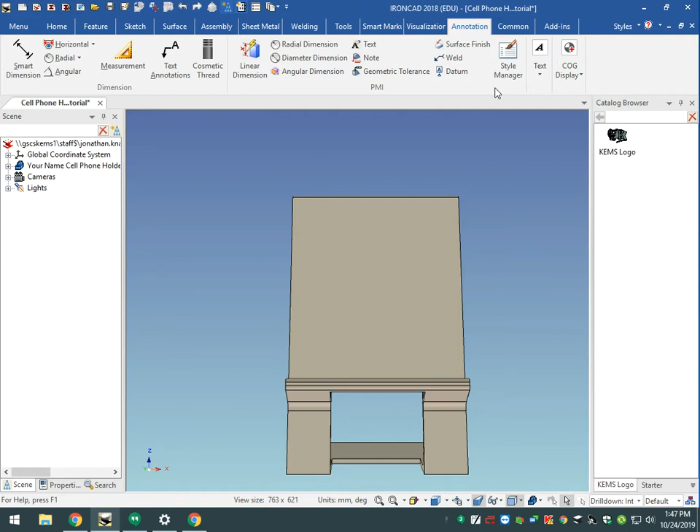To begin with, we're going to add some text. We click on the annotation tab, then click on text. I'm going to left click on text here, then left click on the surface I want the text to appear on. I want it to be 10 millimeters high, and 1 millimeter thick. So I enter 10 and 1, and then next.

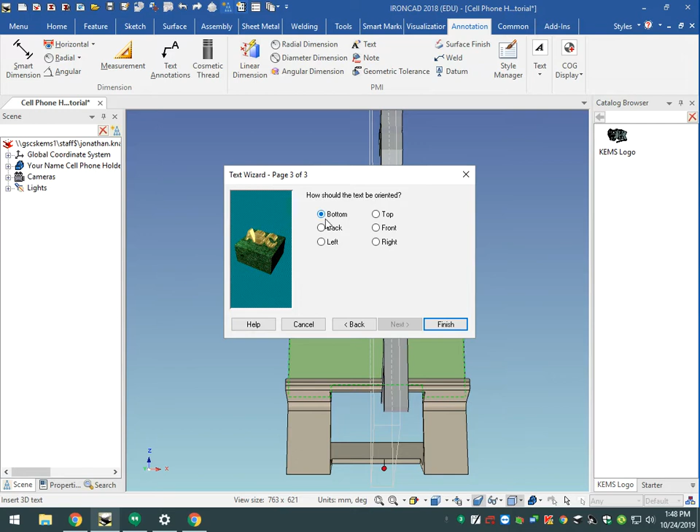We're going to leave this the same, then click next, and change this option to back, and click on finish. Now we're going to enter some text here.

I'm going to left click here twice, just in the blue area anywhere. You can see my text appears now on the surface of my cell phone holder.

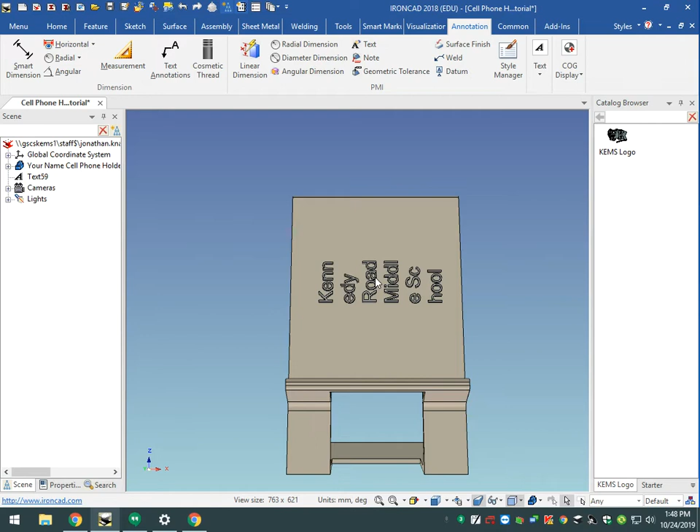I do need to arrange it a little bit, so I'm going to pull these handles, and I also want to maximize its width on the front, so I want to rotate my text.

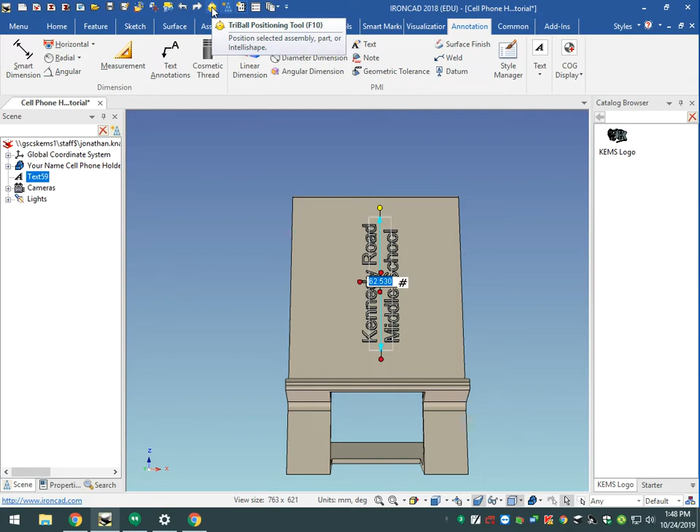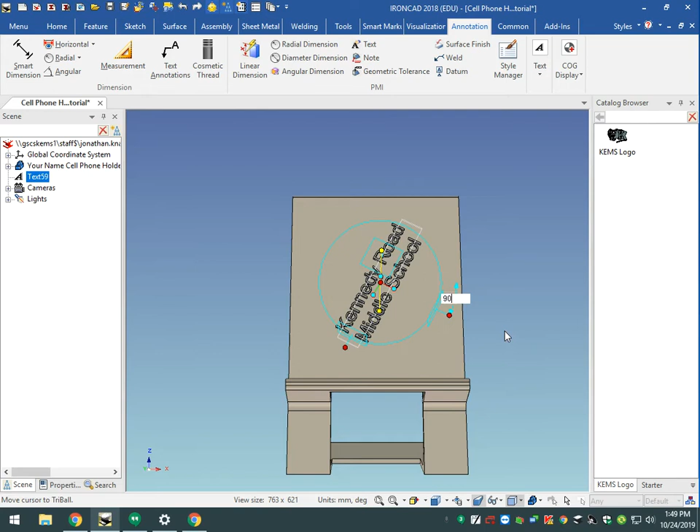So in order to rotate my text, I'm going to come up to the triball positioning tool. I'm going to left click here and select this push pin. Now I can left click inside of the circle right here, and simply drag down and let go. When I let go, this box will pop up, and I can type in 90 and press enter. That rotates it 90 degrees.

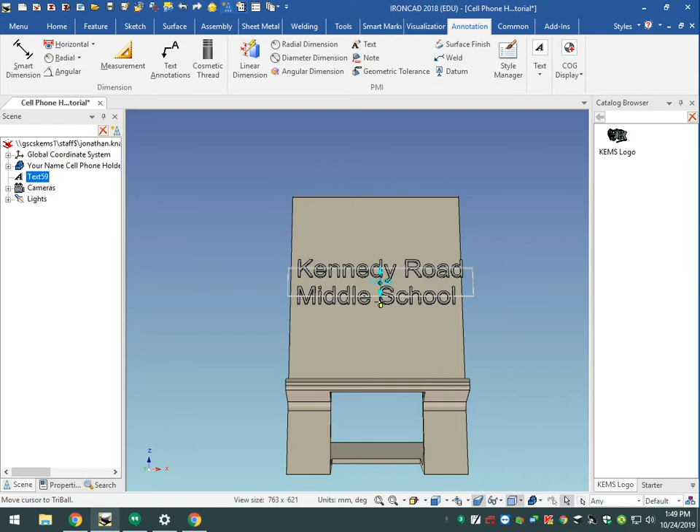I'm going to turn my triball tool off now, and maximize my text size on the front here. If I want it to be as large as it can be, that's probably just a little bit too large, so we just kind of play around with it a little bit.

That looks pretty good. The next thing I want to do is move it up a little bit. So with my text selected here, it's blue, I can turn on the triball positioning tool, and then use this push pin to position the text up higher.

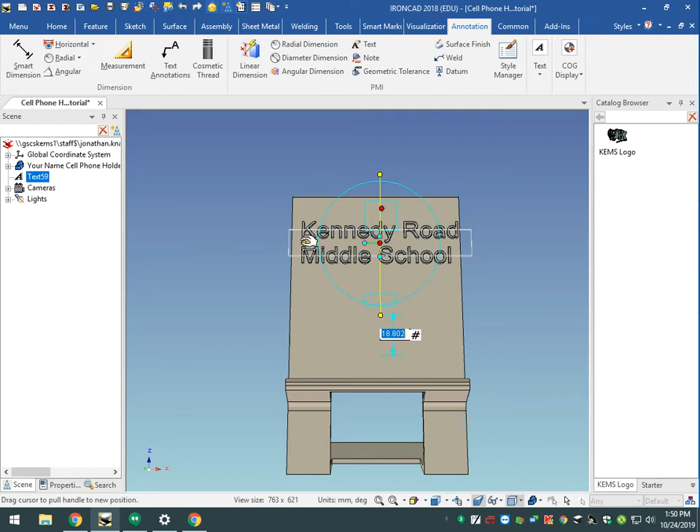I can also use it to center the text on the front of my cell phone holder, and probably put it up here towards the top. Then lastly, I do want to have it be center justified. So I'm going to center justify it and turn the triball positioning tool off.

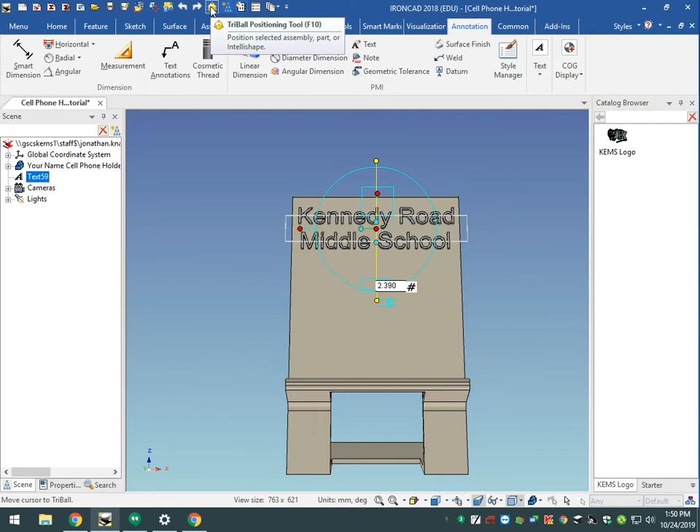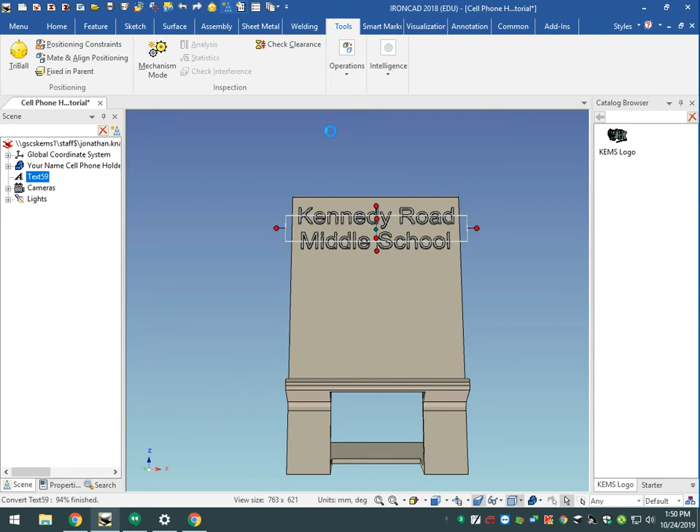Now, in order for me to actually engrave this text, I need this to become a solid part. So with my text selected in the scene browser here, I'm going to go to Tools, then Operations, then Convert to Solid, and I'll just click OK and OK.

Now you can see if I orbit by pressing down the scroll button and rotating, the text has lost its position now that it is no longer text. It's a solid part. I cannot edit the text anymore.

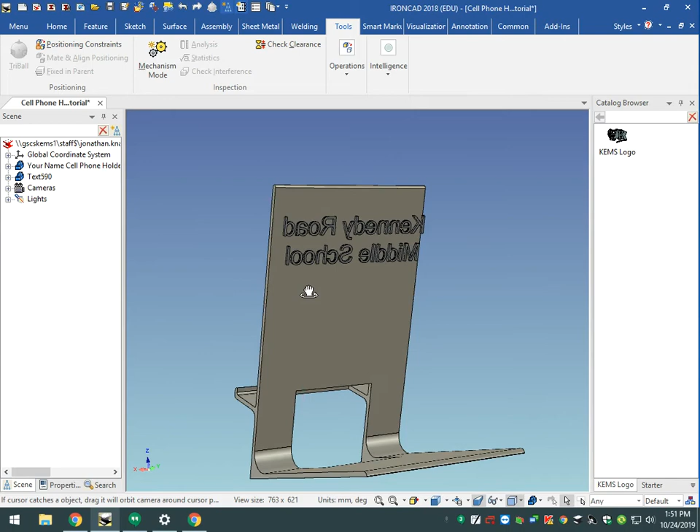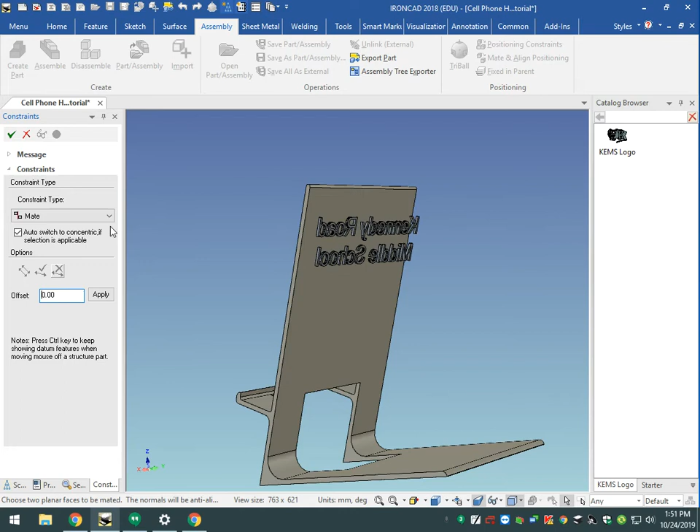So in order to get it back to the front surface, we're going to use some constraints. We're going to go to the Assembly tab, and on the Assembly tab, go to Positioning Constraints. I'm left clicking Positioning Constraints, and we're going to make sure that this option here is Mate.

Now I'm going to zoom in, and very carefully I want to select the back surface of these letters. I want to be careful I don't accidentally select some other surface. So orbit and just make sure that you're getting the back of these letters. I'm going to left click on the back of one letter.

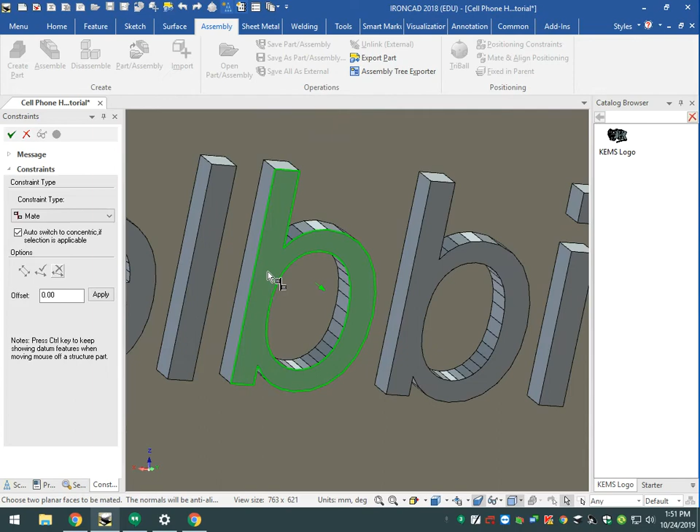I'll zoom out, and now I'm going to orbit around to the front, and I need to select the surface I want it to be mated to, which is this front surface. So I'll left click that surface, and then I'll just left click this check mark. Now my text is mated to the front surface of my cell phone holder.

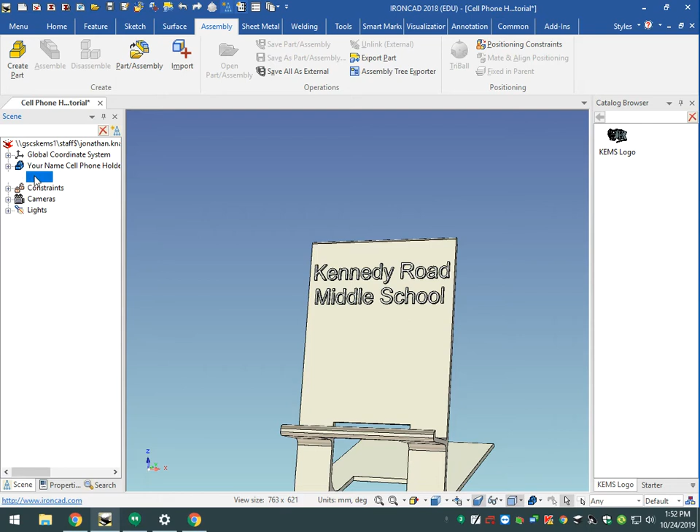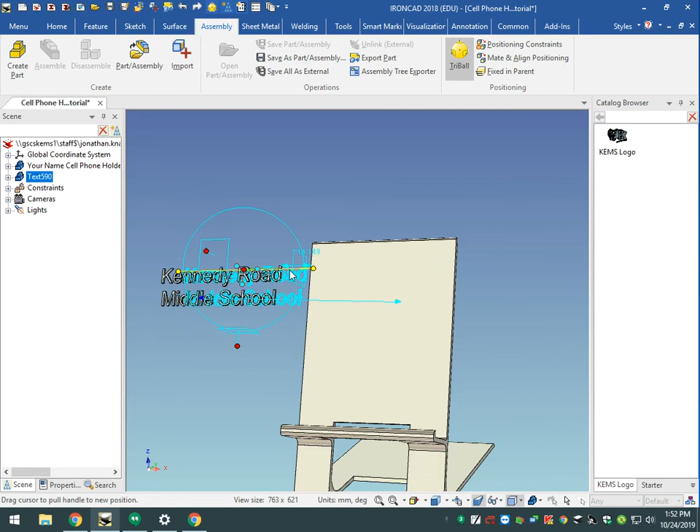Let me explain that a little bit more, what that means. So if I select my text and I come up to the triball positioning tool, turn it on, I can move the text around on this surface left and right. So there I've moved it to the left. Here I've moved it back to the right, and it's still on the same plane as this front surface, the same geometric plane. So I'm going to do a fit scene.

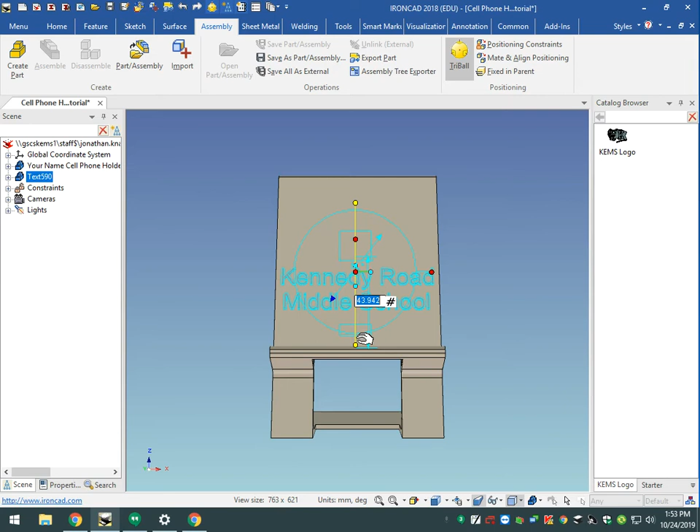I'm going to do a front, and looks like I've got it centered, but maybe I wanted to move it up higher on the front surface. I can do that. I can also drag it down lower. So I can slide it anywhere on this surface that I want to. The only thing that I cannot do is move it either forward or backwards off of the surface. And I can't do that because it's constrained.

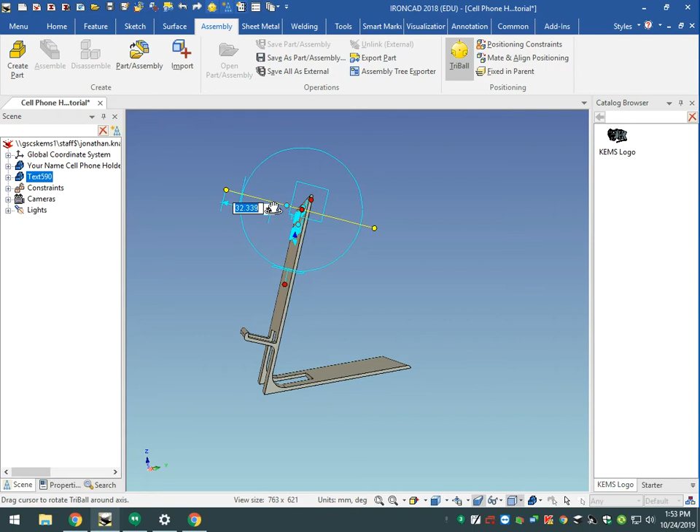Let me show you. If I orbit this way and I try to pick the text up off of the surface, it looks like it's coming off, but when you let go, they snap together. If I try and take it this way, I let go, they snap together. So you cannot move the text forward or backwards off of that surface. In order to do that, because I do need to actually move it into the surface, I'm going to need to turn my constraint off. So I've constrained it so it's on the surface and it will remember that positioning.

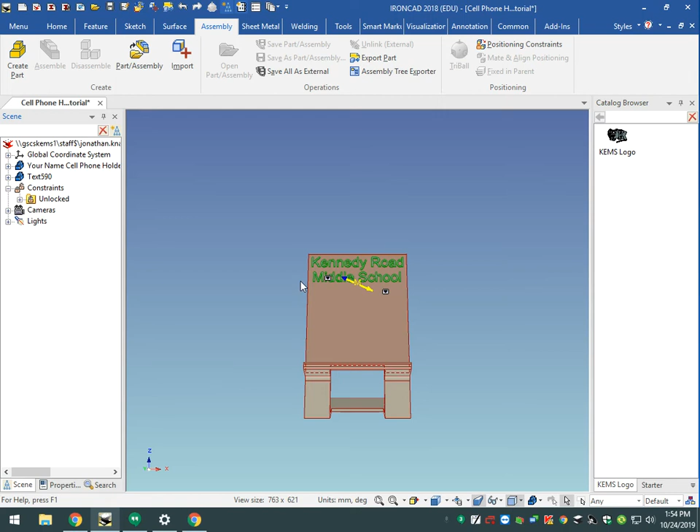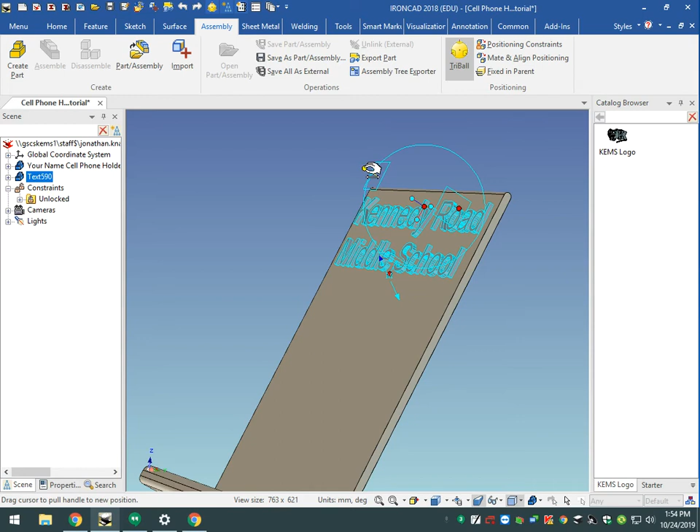So now I'm just going to right click here and I'm going to uncheck lock. Now I can turn my triball tool back on, and I'll show you. Let me orbit here a little bit so you can see what's happening. I want to sink it into the surface of my cell phone holder. So I'm just going to grab this push pin. I'm going to drag it or push it down towards the surface, and you can see it actually coming out the back. So I'll let you see that.

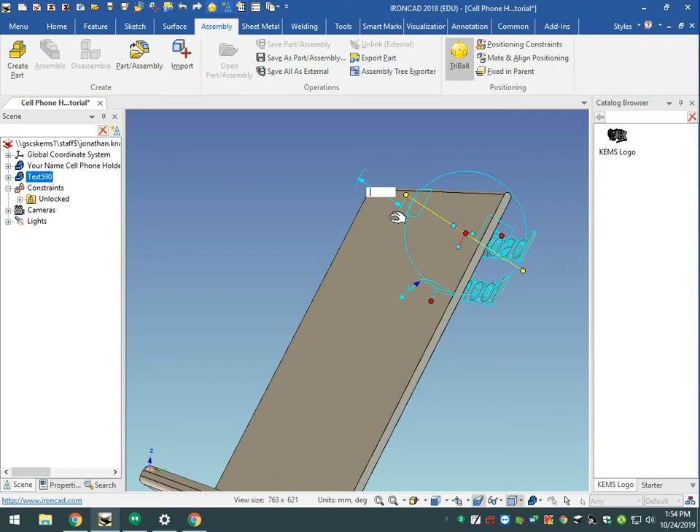So I let go right here. And if I just left it, it would be behind my cell phone holder. But I only want it to go into the surface 0.5 millimeter. So in this box that has popped up, I'm going to enter 0.5. That's 0.5 millimeter. And I'm going to press enter. Now my text is actually sunk into the surface 0.5 millimeters. Not very much, but enough that if we remove the text and the material that it is sunk into, we'll be able to see the letters engraved in this surface.

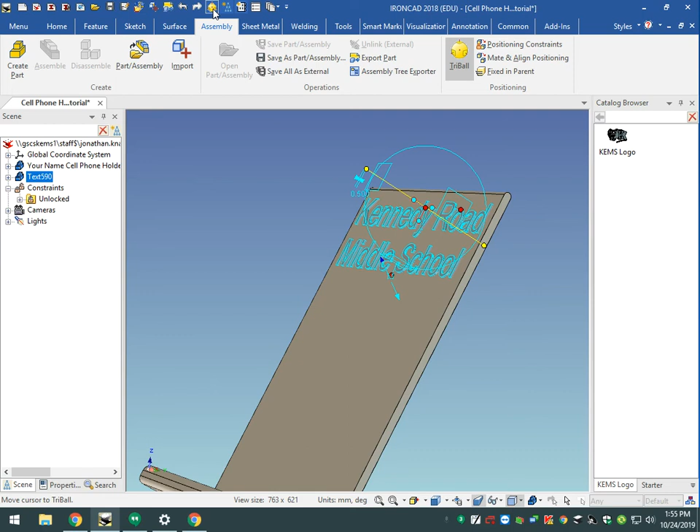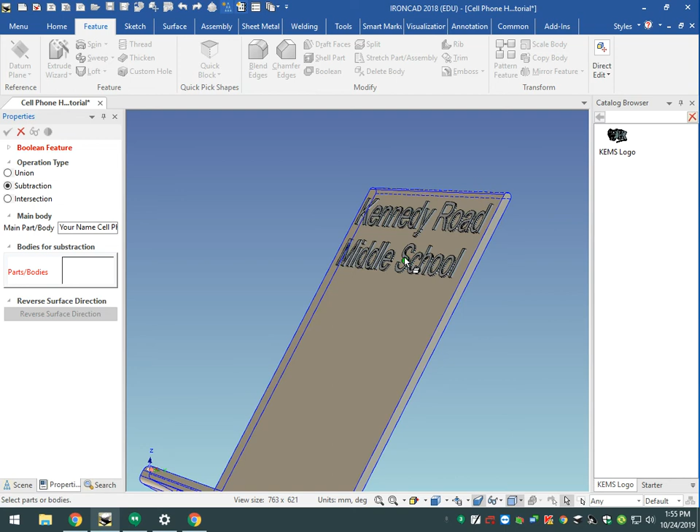In order to do that, we'll turn the triball tool off. We're going to come to the scene browser and select our cell phone holder main body. And we're going to go to feature, and we're going to select Boolean and subtraction. So with subtraction selected, we're going to click on our letters here. So I'm going to left click that. You'll see that my text pops up in bodies for subtraction. And now I just click the check mark and I select OK to this message.

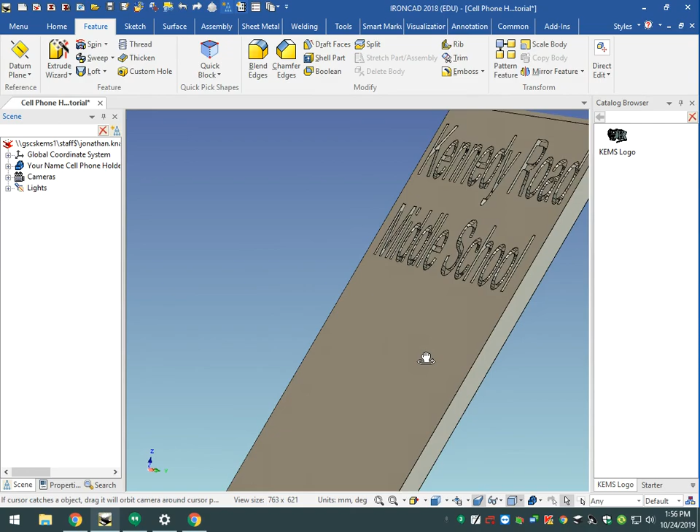And it deleted my letters, and it also deleted the 0.5 millimeter of material that the letters were sunk into. So that's going to leave a nice engraved effect when I go to print this out. And that is how to use the mate command along with the triball positioning tool to position letters on an object, and then use the Boolean command to delete the letters and leave behind an engraved text effect.